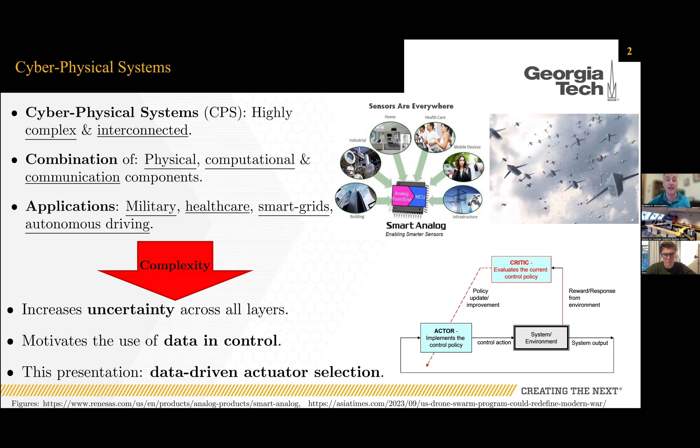This increases the complexity and the uncertainty across all layers, which again incorporates layers of physical, computational, and communication layers. Our work tries to bring ideas from data-driven control, and we want to see how we can intelligently place actuators and sensors in such a system with less information about the model, while letting it be adaptive to change, and also resilient to different adversarial components that can enter the system as it becomes more intelligent.

Before we see how we can actually select actuators and sensors, I'm sure all of you are familiar with what an actuator is. It's a device, which you can see on the right, that can implement a control input. In other words, it is every column in a matrix B. For example, if we take a linear system, x dot equals, say, Ax plus Bu, every column of the B matrix is actually an actuator, okay?

So why do we want to actually work on actuator selection in complex adaptive systems? Because we want to improve controllability, we want to be resilient to several faults and failures, and we want, of course, to improve energy efficiency. So this is a small motivation of why.

And of course, actuator and sensor selection are dual to each other. You can think that a sensor is a row of a C matrix, and then you want to improve observability, but while also being resilient to faults and failures and so on. So every time I talk about one, you will also see the dual.

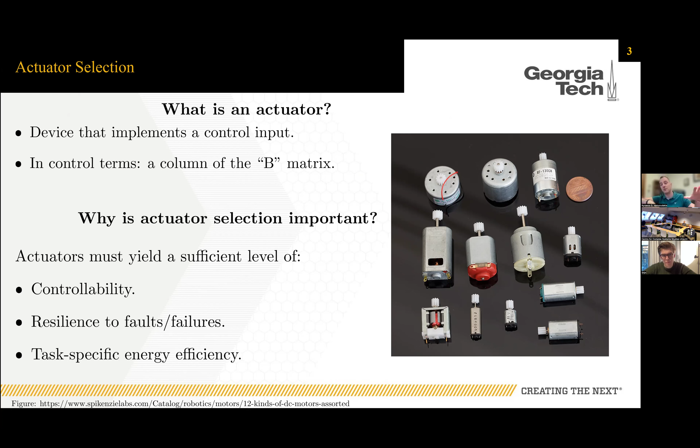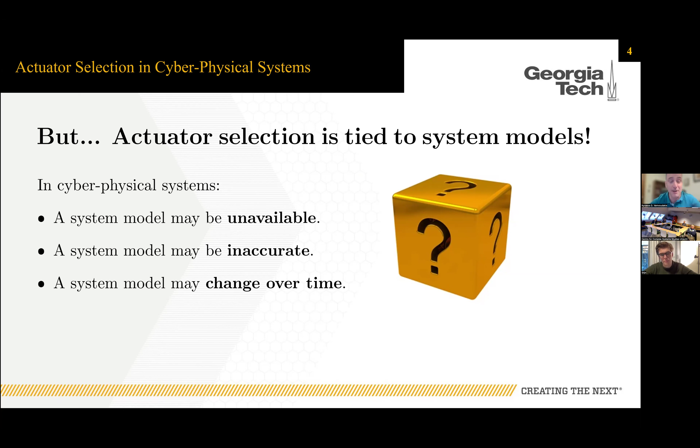Up to now, if we want to make complex adaptive systems, we want to make our algorithms depend less on models - in other words, completely data-driven and completely model-free. Up to now, every time you want to select your actuators to incorporate into your system, everything is tied to system models. But in a cyber-physical system perspective, if we want to make them more intelligent and adaptive, we don't know much about the system, or it might be inaccurate, or it might change over time.

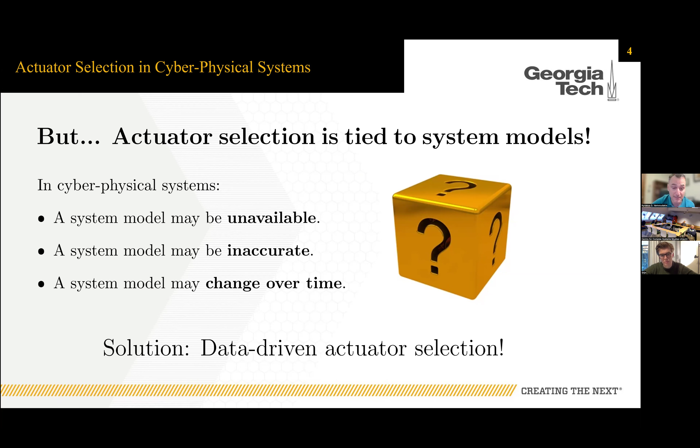So we want our algorithms to be less dependent on our systems, and what I mean by that is the physics of the system - the dynamics of the system. That's why we have been working on solutions that are data driven, and you will see how this can be achieved.

So let's actually start motivating the problem and see how we can take a model-based approach and make it model-free. As controls people, we work with dynamics. Let's say, for example, I have a linear system x dot equals Ax plus Bu, where x is the state, u is the control input, A is the drift dynamics matrix, and B is the input dynamics matrix. Everything I develop later will be model-free, but I want to motivate it based on the model first.

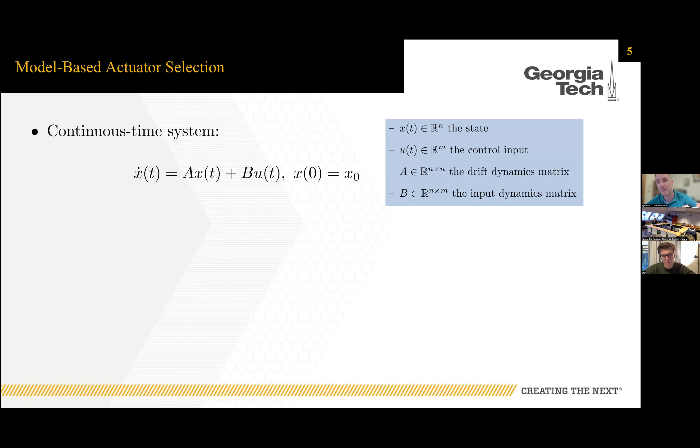And of course, we have worked also on nonlinear systems, but I want this presentation to be clean and show you how clean equations we can get.

As I said before, each column of this matrix B that's linear to U is an actuator. So every B matrix will have a B0 part and a B-script-B part. What this means is that we have already incorporated some actuators into the system, but we want to select some more to improve controllability, improve resilience to faults, and so on. So every time you see B0, that's the actuators already part of the system, and every time you see B-script-B, those are the actuators that need to be selected.

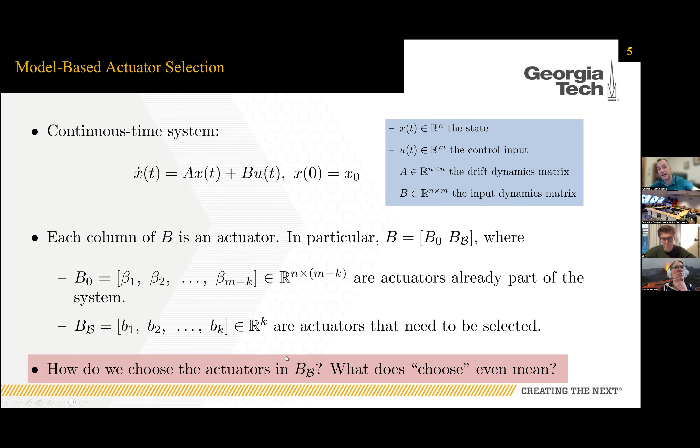So we have freedom in only picking this B-script-B. I want to choose the best ones, put them into the system, improve controllability, and so on, as you will see. But before that, what does it mean in practice?

I have a pool of available actuators, and usually in a complex adaptive system or cyber-physical system, you have redundancy in everything you do—redundancy in your sensors, redundancy in your actuators. So if something goes bad, you want to put something else in.

So what does choose mean in our framework? Every time I say choose, it means I have a pool of available actuators—let's say I have n of them—and I want to pick the best k of them to put into the system, in a way that improves controllability.

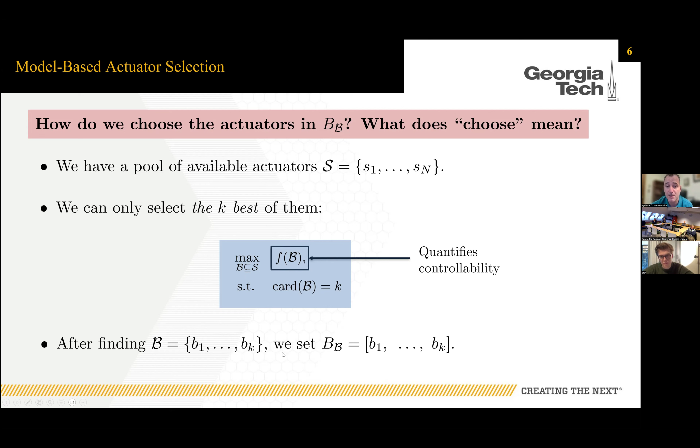Since I want to improve controllability, every time I say improve, it means I want to maximize or minimize—in our framework, we want to maximize controllability. So I have to find what I want to maximize, and this cardinality B equals K is because I want to pick the K best of them. After we find this K, as you'll see in a bit, we set them into the choosable B and incorporate them into the system.

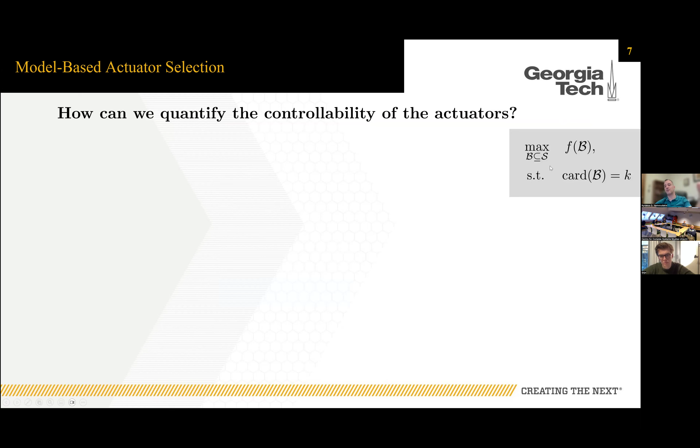I told you I will maximize controllability, but I didn't give you an equation for it yet. This f of script B will be quantifying the controllability.

Let's say we take a pure minimum energy control problem where I want to minimize U, picked in this way—this is a straightforward optimization problem, a minimum energy problem. The more controllable systems have smaller optimal values. This has a straightforward closed-form solution, given by this expression, which is the optimal value. Of course you see this Q that is inverted—every controllable system has this invertible. This is the controllability Gramian that we've all seen in several controls classes or papers.

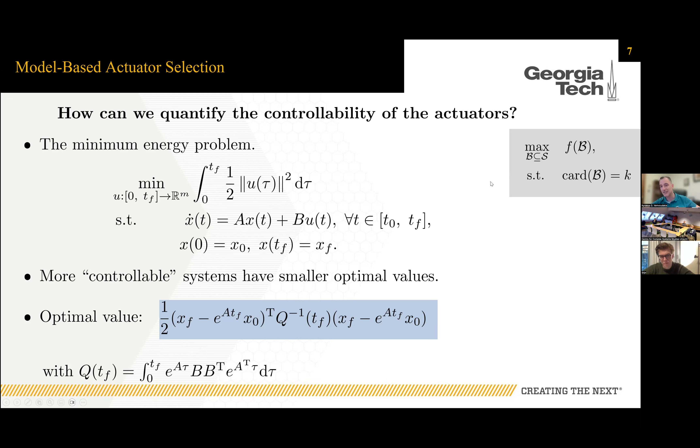So let's see how we can incorporate this controllability Gramian inside this optimization. Again, this controllability Gramian quantifies the efficiency of the B matrix. As you can expect, the larger Q is better, and the smaller Q is worse.

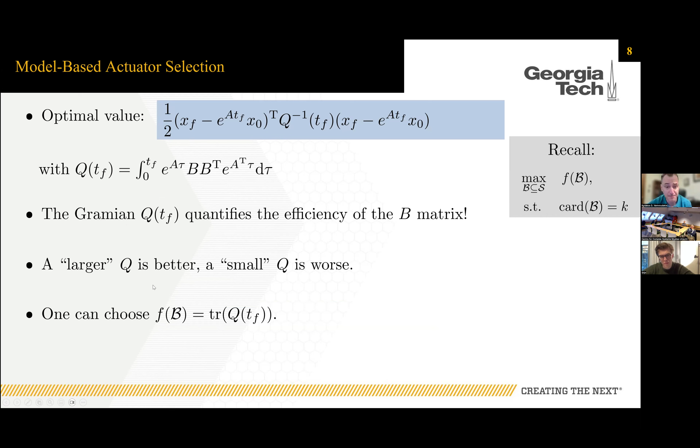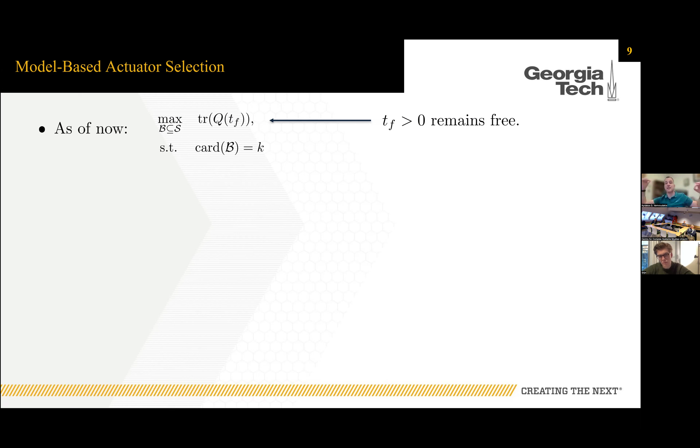So let's choose this f of B to be the trace of the controllability Gramian. As of now, we have found that I want to optimize the trace of the controllability Gramian, and still my final time remains free. Of course, I want to do this optimization with respect to having k actuators to choose.

So we still want to provide a framework that solves all these equations in real time, in a data-driven way, without requiring any information about A and B.

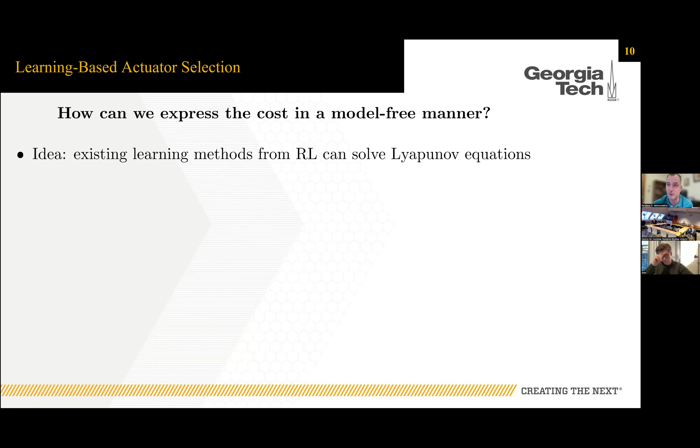Our work has done lots of stuff in reinforcement learning. Let's see how we can use learning methods from reinforcement learning to solve this Lyapunov equation that you saw before. The reinforcement learning methods we use in control focus on the dual Lyapunov equation. What I mean by dual is that the transposes appear in a different way. You will see why this can potentially be a problem.

We can have a theorem where we can solve this f of B in a closed form solution. But all these things are model free, and we still haven't found a solution up to now of how to do that. You will see how we can convert these Lyapunov equations, which are in a form not dealt with before in RL, to a form we can deal with and solve in a model-free framework. We had our controllability Gramian before, so now we've rewritten our optimization problem in this way.

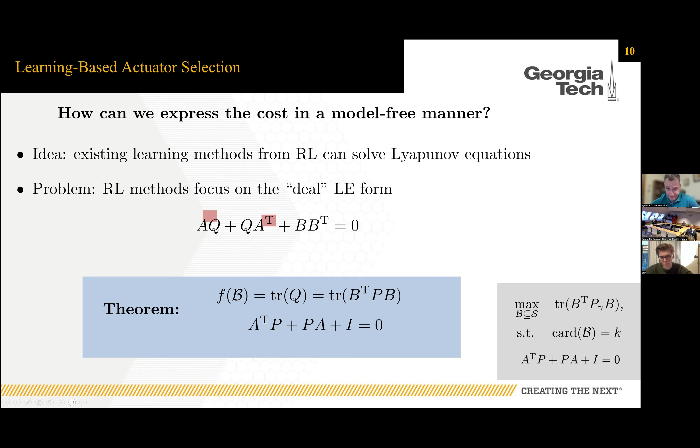Let's see how we can use reinforcement learning to express our cost with data, completely data-driven. The main idea is pretty simple because this A transpose P plus PA is almost the derivative of X, vaguely speaking. Let's see what we can do.

Every time we want to do reinforcement learning, we want to have everything that we don't know in a component that we will approximate. We call it a weight vector, or the vector of unknowns. Then we use everything else as a basis or activation functions to tune our weights. Since this A transpose P plus PA is almost the derivative of X, the matrix P will satisfy these equations.

Remember, I want to find this P if I knew the model. Since I don't know it, I just want to put it in a vectorized form. I vectorize my matrix P and put all the unknowns there. Then this is, you can think like an activation function, which is like different Kronecker products of the states and the control inputs that you put into the system.

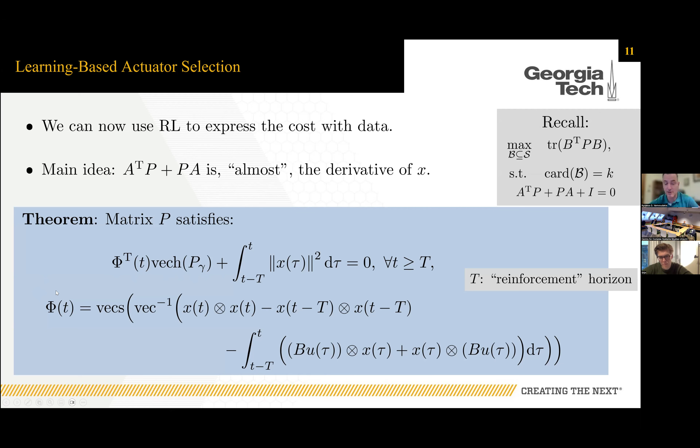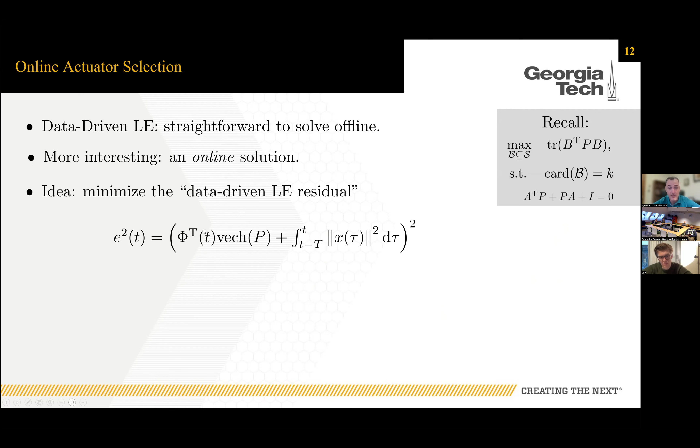So what people in reinforcement learning do is define a square error. If you didn't have this square here, what you'd have would be called a temporal difference error. So then I can do pure gradient descent on this and pick my vectorized P to take this error to 0. This is actually what I told you just now.

So now I can find the components of the unknown matrix P that you see over here. And I can solve it without having any information about the system, as you can see here.

Of course, everything we do is guaranteed with different theorems. We actually prove that I can identify my ideal P given some persistence of excitation conditions on phi. Persistence of excitation means I incorporate some noise into my control inputs to do the exploration we want in learning, which is actually equal to doing persistence of excitation in adaptive control.

Of course, we can also relax this persistence of excitation by using previous data. But for now, let's focus on that one. Here we will be able to solve the problem you see on the right-hand side, to find the P without information about the dynamics, and we do it online.

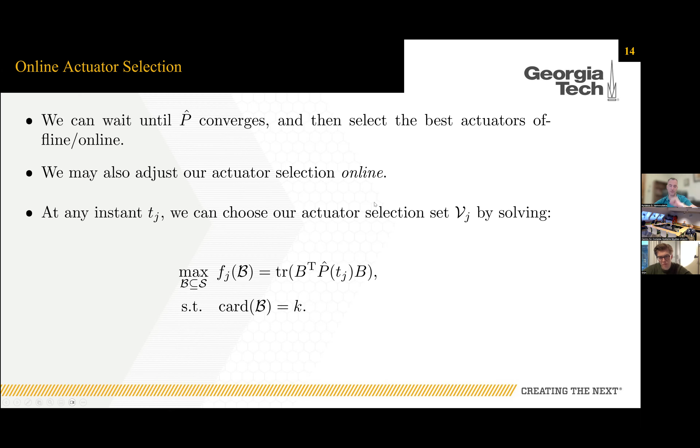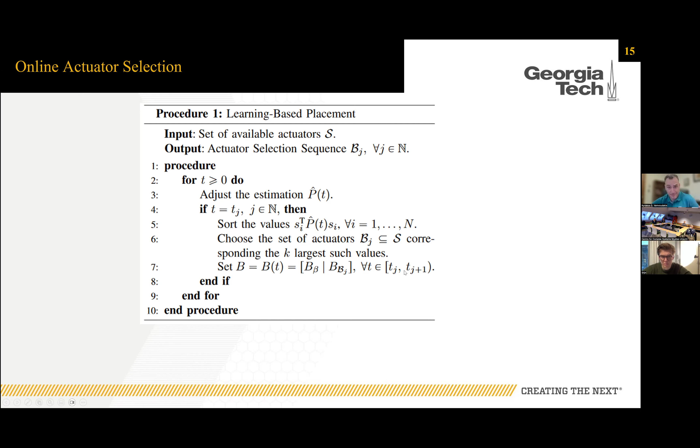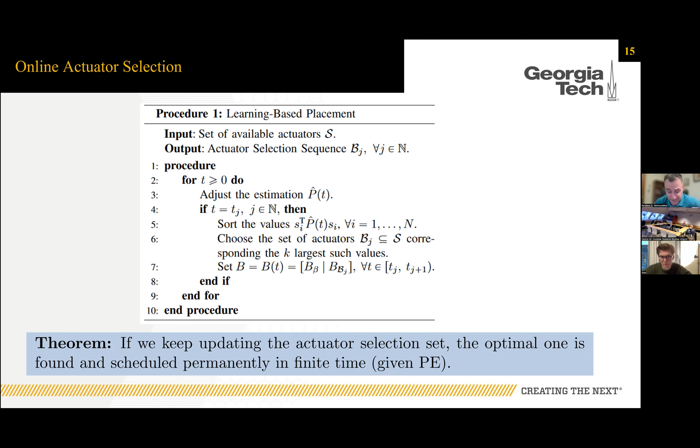Of course, as I said, everything we do comes with guarantees and theorems. So if we keep updating the actuator selection set, you will see every TJ I will eventually find the optimal one, and it will be scheduled permanently in finite time, given of course I have a guaranteed persistence of excitation condition.

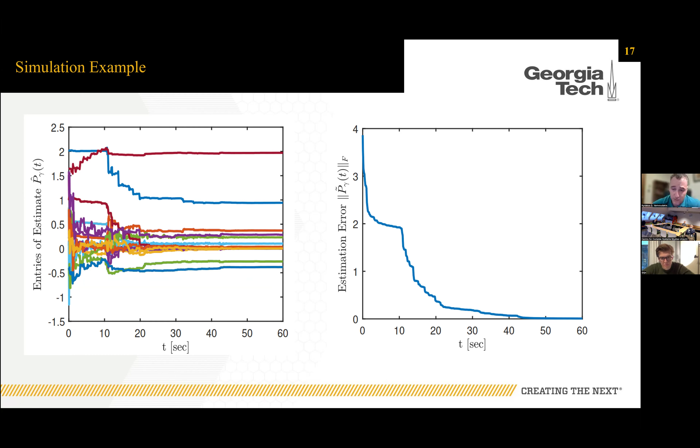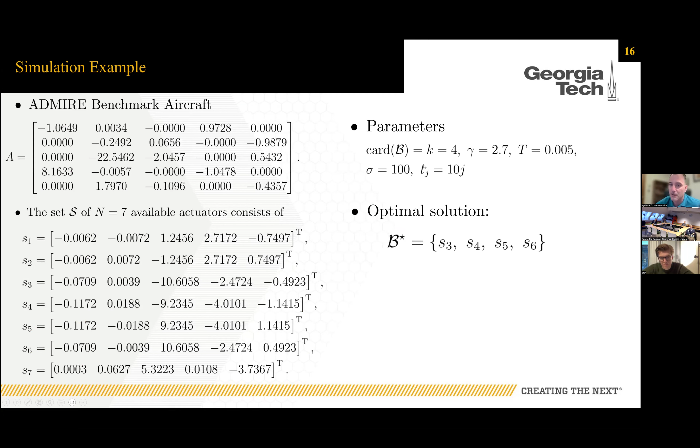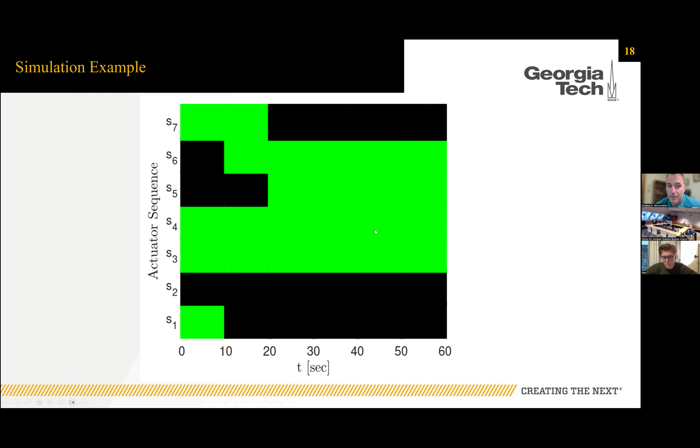Here you can see that black tells me which actuators have not been used, and green are the ones that have been used. You see that the optimal one is 3, 4, 5, and 6, which is the same as my offline solution, and all these things are learned in real time. Again, black tells me the actuator is not used, green means it is used. So again, 3, 4, 5, and 6, which is the same as the offline solution.

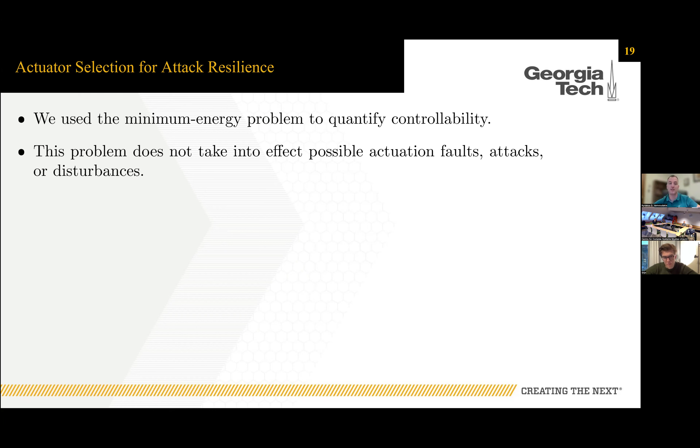Actually, this is pretty straightforward. We can reformulate this as a game. We can have a zero-sum game or minimax solution where I find the minimum over U and the maximum over A. A can potentially be a worst case attack, worst case disturbance, or anything unmodeled to my system. So now instead of quantifying the controllability as before, I can quantify this using the game equations.

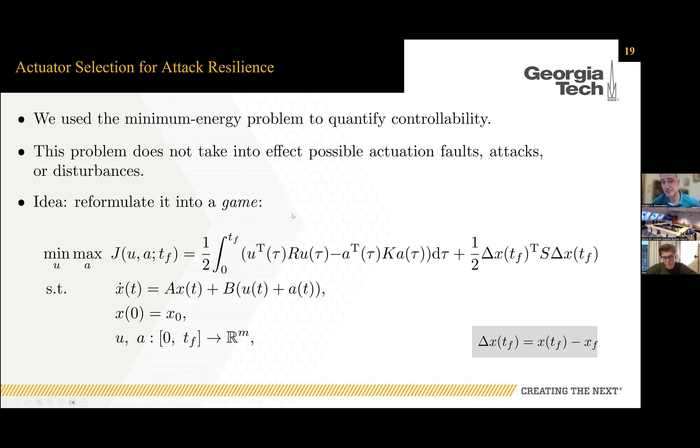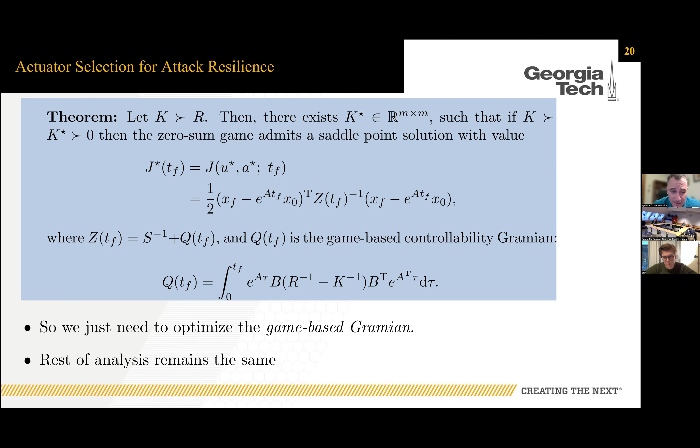So again, everything that we did before will be slightly changed. Instead of having the pure controllability, I have this game-based controllability Gramian. And instead of learning the solution to the controllability, I learn the solution to this game-based Gramian. All the analysis after that remains the same.

So now, what we have done up to this presentation, we have developed the first model-free actuator selection algorithm. By design, all these actuator selection algorithms are very computationally expensive even to solve offline. We selected our actuators to quantify both controllability and attack resilience, and of course, every model-free approach we do, we want to show equivalence to the model-based approach.

We don't want any relaxation—this isn't a relaxed version. This model-free version converges to the model-based approaches, and we have published several papers on that.

Let's see how we can even improve on that in other scenarios. What you saw up to now was that controllability was measured on average, but not really across closed loop trajectories. So let's see what we can do now.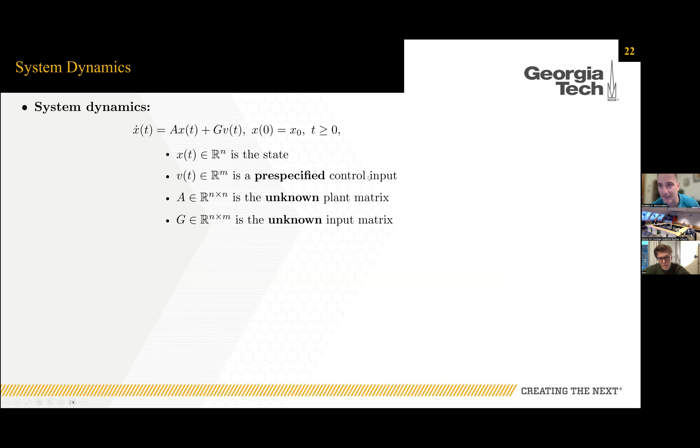Let's change the framework a little bit. Let's say I have again my linear dynamics: X is the state, V is any pre-specified control input, and A and G are unknown plant and input matrices. Of course, every time I want to map from actuators to controls, I can write this V as BU, where B is columns comprised of the actuators, and U can be actuator commands.

You'll remember I told you about actuator redundancy. A system is actuator redundant if I can pick a K larger than M, which is the rank of matrix B.

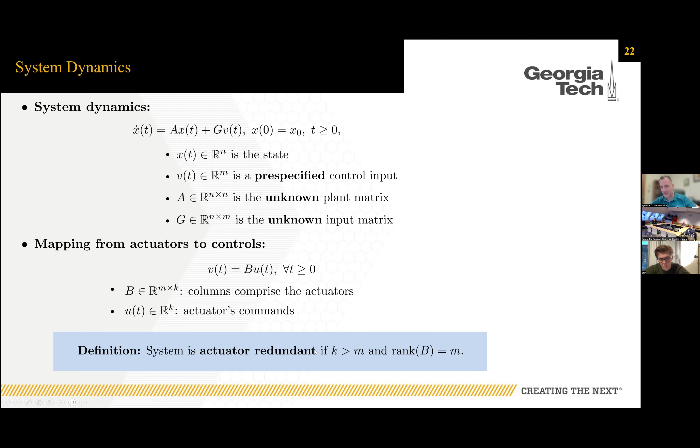Since we don't want to do this only on average, we want to do it across closed loop trajectories. So our problem now becomes an optimal control allocation, not an actuator placement anymore, but optimal control allocation. This is another important problem in control. Let's see what this problem actually is.

With actuator redundancy, I can always write any control input V with the proper choice of U, since V is BU. So what I want to do in the allocation problem is choose my U with minimum energy—this is pretty straightforward. This W is just how much I weight each actuator. Again, this has a closed-form solution, pretty straightforward: the optimal solution is this one, and the optimal cost is this one. Nothing interesting up to now.

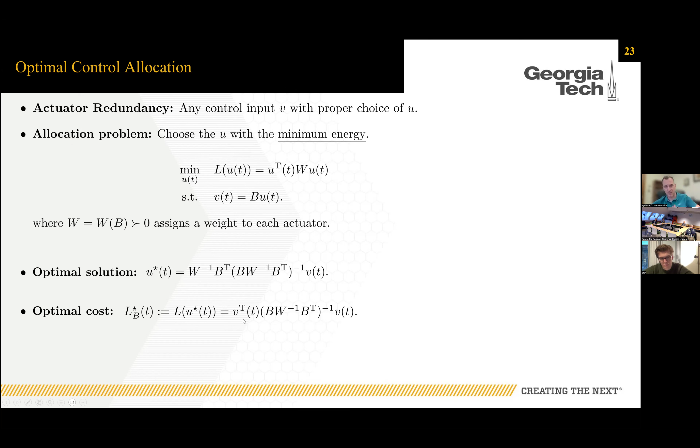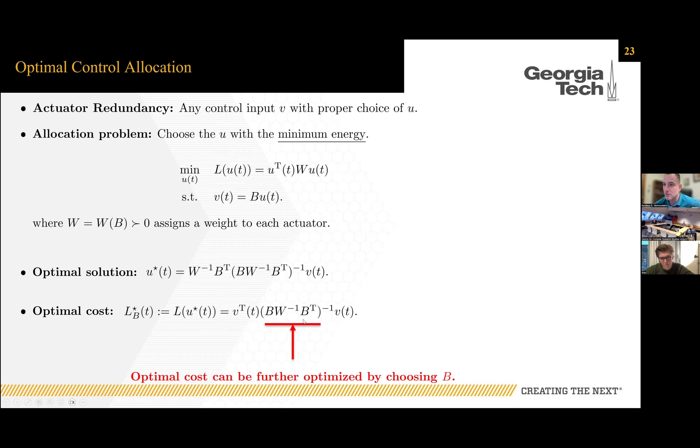But I want you to pay attention to this part: BW inverse B transpose. I can improve my cost by changing my B's and my W's. Let's see what I can do with that.

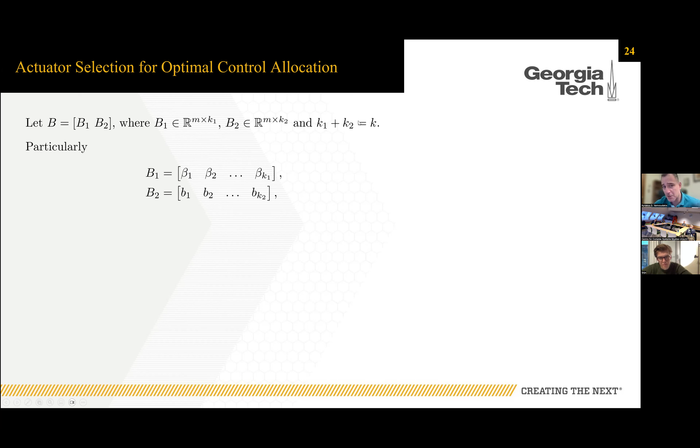Let's try to see how we can incorporate whatever I did before for actuator selection, but now for optimal control allocation, in the same framework. Let's say I have a B, which is B1 and B2, and if I add how many I have in B1 and B2, I will get K. Same as before, I have a fixed part and a choosable part.

So same as before: I want to pick the choosable part so that the minimum energy, LB star T, that you saw before, is minimized. And I want to do that by changing also something I've done before.

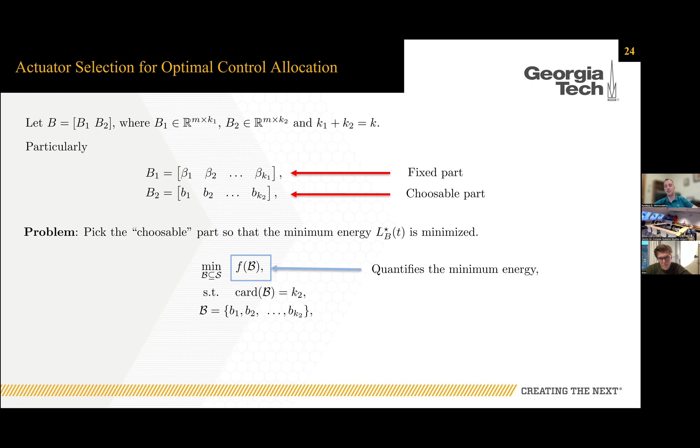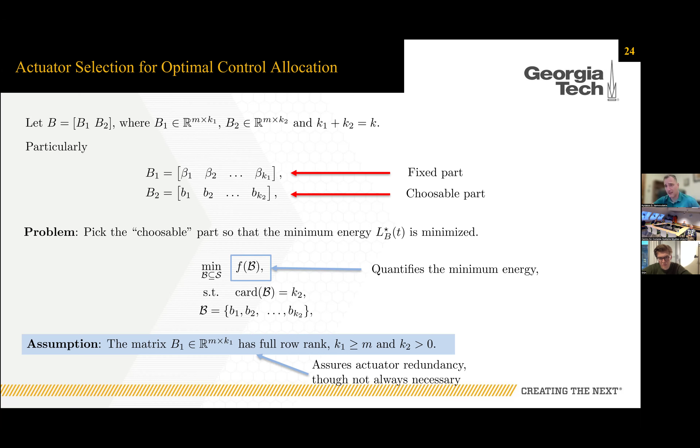This f of b is not the same as before—it will be changed a bit. This f of b will quantify the minimum energy; before I was quantifying controllability. The matrix B1, the fixed part, has full row rank—this is to assure actuator redundancy. This is not always necessary, but to make the results cleaner here, I have to stick with it.

Let's start seeing in very simple steps how we can do this. Case one: agnostic actuator selection. Remember that the minimum energy I found, the cost, is given in this framework. Of course, if I don't know V, I cannot directly optimize that over all the B's.

So I can do that on average instead. My f of B, which I want to optimize, will be the trace of BW inverse B transpose. This is what I want to eventually optimize, because this minimum energy can still be optimized by choosing optimally this guy in the middle. Let's see now how we can do that. So this one is more agnostic—let's say, if I knew V, what it would be.

Suppose now that my V has an initial condition distribution known as Kx, okay? Of course, my A plus GK is Hurwitz, okay? So I can optimize this minimum energy directly over an infinite horizon, and I can choose my F that I want to optimize from before to be this one, okay?

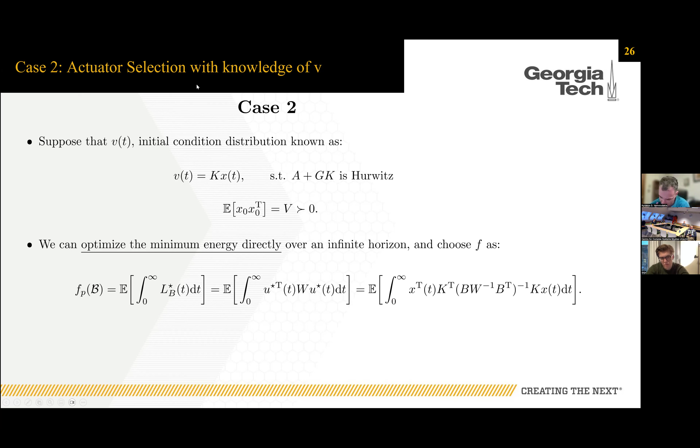Again, remember, this is what if I knew the V. The before was if it was V agnostic, okay? So this is how we can optimize my FB and solve it.

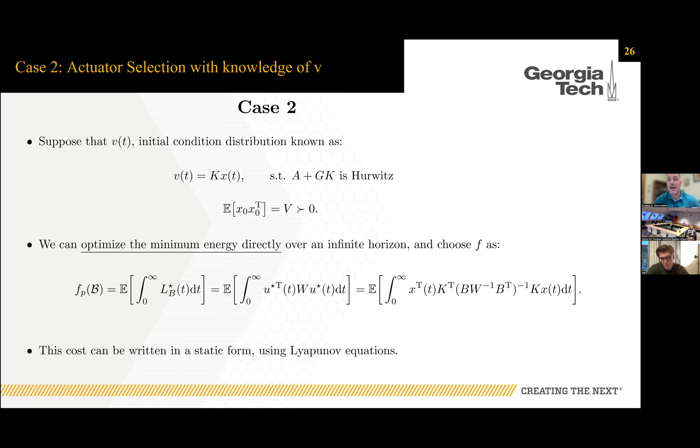Okay, so again, since I want to eventually do learning in these model-based equations because I want to make the model free, I know how to solve equations that come in a form of Lyapunov equations. So let's see actually what we can do.

So I'm trying to solve this problem here with some Lyapunov equations. It was straightforward to derive that this problem can be solved by these two coupled Lyapunov equations. So then instead of solving QR, I can definitely solve also a trace of PV.

Okay, of course, if I do the PV though, it is actually inefficient because this solves Lyapunov equations for all points in 2 to the power set of S. But using the trace of QR requires solving only one Lyapunov equation for Q. Okay, so let's see how we can do that.

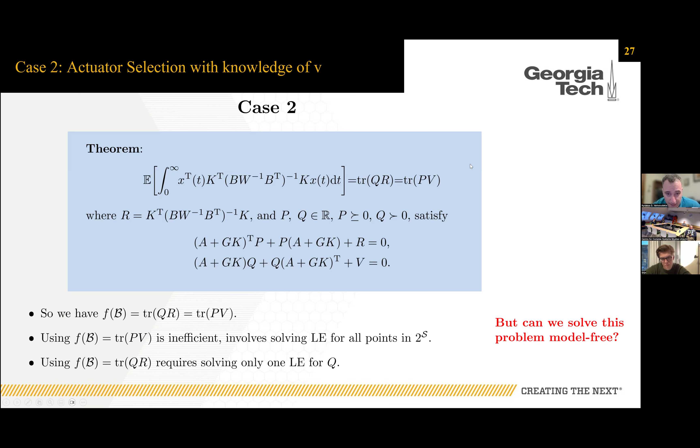And of course, I want to do that in a model free way. I don't want to have any offline solutions and solve all these equations by having information about the system.

Okay, so again, recall now that I have picked my cost function to be this trace QR subject to these Lyapunov equations. Okay, so as you see, the only part that has information about my dynamics is the second part. Remember that my system was x dot equals ax plus gv. So the only part that has information about the system dynamics is the second part.

Okay, so but still also the cost depends on Q, which also depends on A and G through the Lyapunov equation. So let's see what we can do.

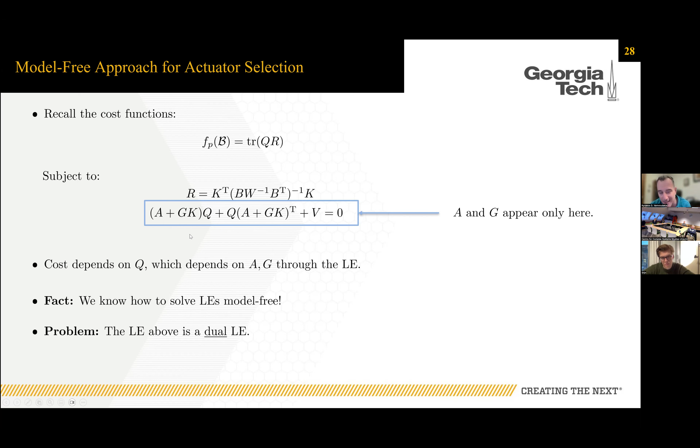Okay, we go back to our model-free formulations. But again, see that this Lyapunov equation has the transposes on the wrong part. It's not really a Lyapunov equation, but it's a dual Lyapunov equation.

So how we can solve this problem is I have to turn it into a nominal Lyapunov equation, and after that, use the techniques I know in reinforcement learning to solve this problem.

Okay, so actually, we can turn this dual Lyapunov equation by multiplying left and right by Q inverse, and of course, Q is non-singular by our theorem that we had before.

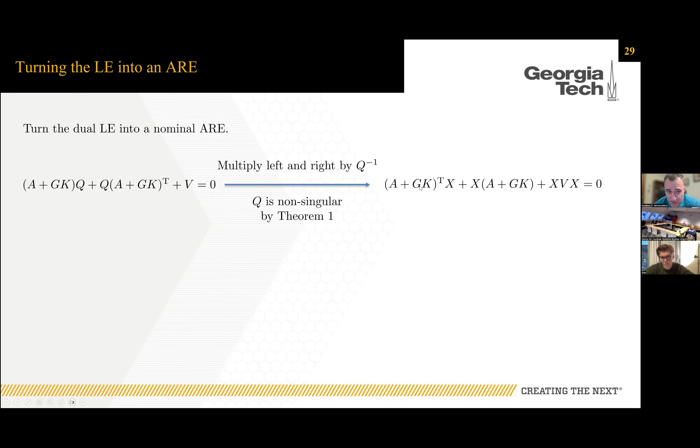So again, I can change my Lyapunov equation by multiplying left and right with Q inverse to make it look like that. Now you see that the transposes appear in the correct places. So we can use any techniques that we can solve these equations in a model-free framework.

Okay, and what we can do is we want to first find a gain that stabilizes the plant, A plus GK, and then I can perform any algorithm in a model-free framework such as ADP or off-policy learning and so on and so forth.

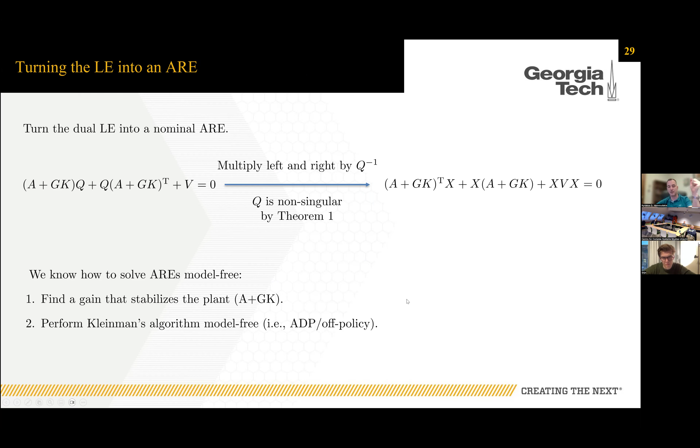Again, every time we have a Lyapunov equation, which is actually the dual Lyapunov equation, I can always put the known and the unknowns into different vectors, and then eventually I can solve it with off-policy learning.

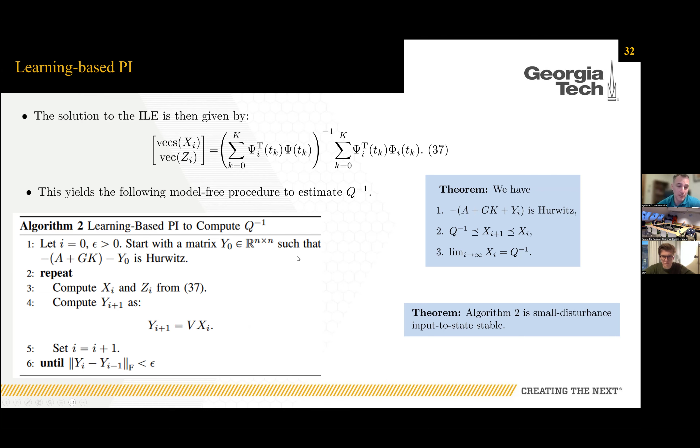So again, we prove also that not only the model-based framework is converging, but also the model-free framework will converge with different theorems. And then, of course, we prove that this algorithm that you see on the left is small disturbance input to state stable system. Let's see how this can work.

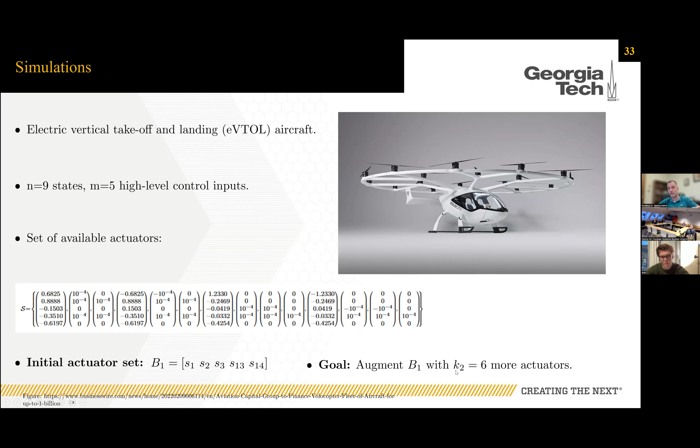Let's say I have this eVTOL, which has 9 states and 5 high-level control inputs. The available set of actuators can be picked from this pool over here. My initial actuator set is incorporating 1, 2, 3, 13, and 14. And I want to augment my initial actuator set with 6 more actuators. So let's see, remember my cost function was Q and R, right?

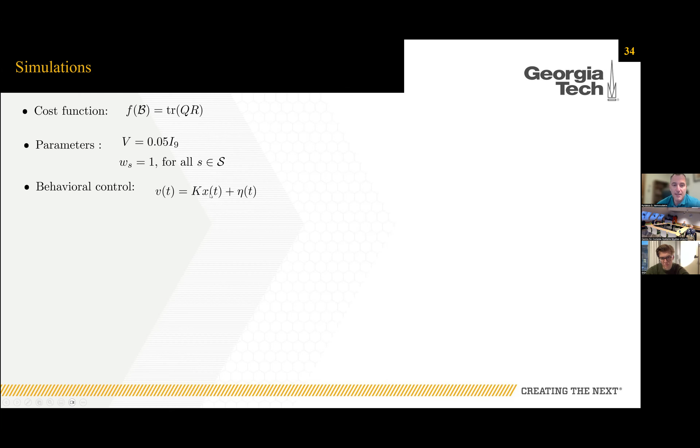My parameters and my behavioral control can be Kx plus eta. Again, remember that I want to guarantee persistence of excitation, and I can do that by incorporating some exploration noise. So what you see on the left is the norm of the states, and you can see that it goes to 0, it's very small.

Also the norm of V, which is my control. And then here you see that eventually my off-policy learning was eventually converged to 0. So this is the error between Xi, which is the converged, and Q inverse, the optimal one. So you see that converges to 0, and so eventually I converge to the right solution.

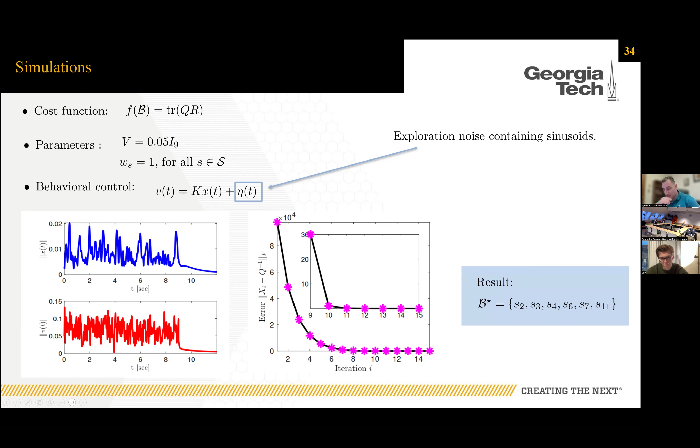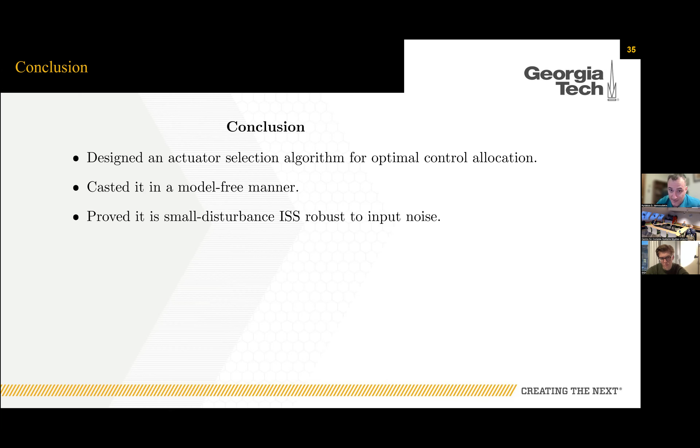So if I do that, then you will see that the optimal solution will be 2, 3, 4, 6, 7, and 11, which actually agrees with our model-based techniques. So what we have done up to now is we designed and found solutions to some computationally expensive, even offline frameworks, and we do them online in a model-free way, and we prove that it is small disturbance input state stable, and we're robust to input noise. And then we have published several papers on that.

Okay, we have questions? Thank you very much. No, we have more. We have more. Oh, you have more? We have a little more. I heard some noise, I was like, do we have any questions up now? We have a little more.

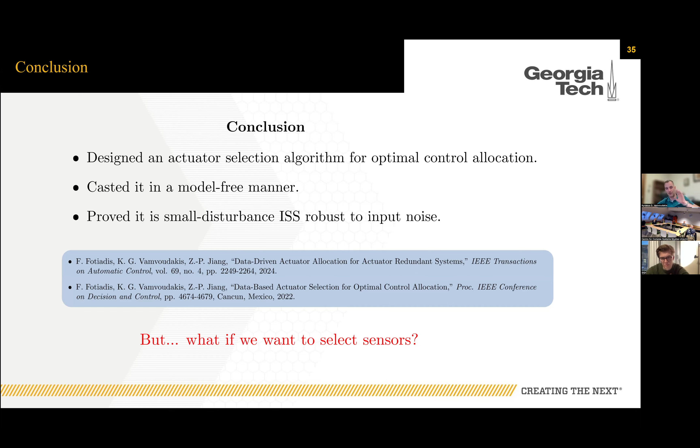And so I told you that the actuators and the sensors, they are dual. So let's see actually how we can do sensors now, pretty brief. And again, we can deal also with discrete time systems. So let's say that I have this system here, xk plus 1 equals axk plus buk, and y is cxk. And again, now a, b, and c are unknown.

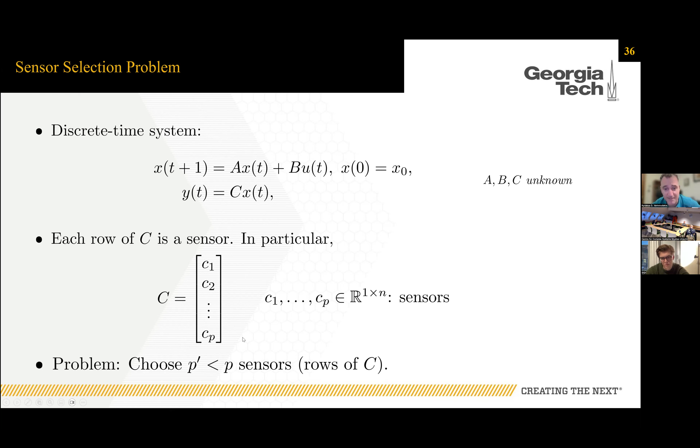Remember before I had columns for actuators, now I have each row of C is a sensor. And I want to choose some of the sensors in this C matrix. So of course I can choose a P prime, which is less than P, where P is the number of rows of C. So again, remember that choosing sensors is actually choosing rows of C. So in a similar framework with before.

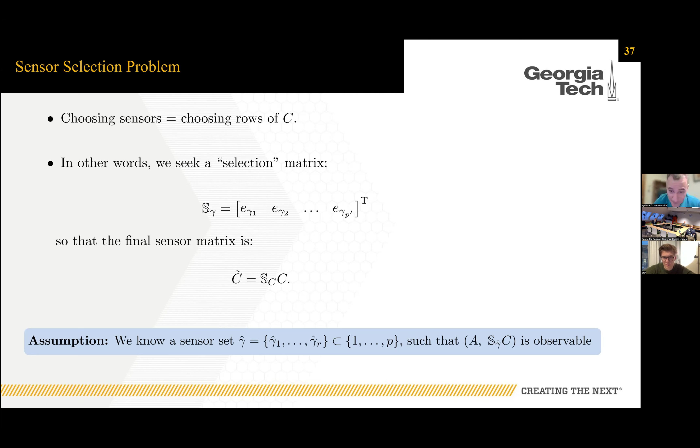So we want to make sure that I can find a way to pick these rows of C. So this is a selection matrix, you can think this has 0s and 1s. And the final sensor matrix will be C tilde, which is this selection matrix multiplied with C. Again, vaguely speaking, we can find this E gamma 1 to E gamma P prime. So again, for us, we need to know an a priori set of sensors that will make our A S gamma C observable.

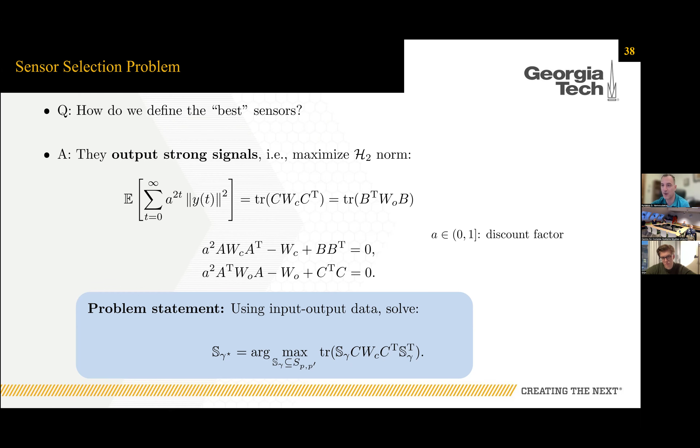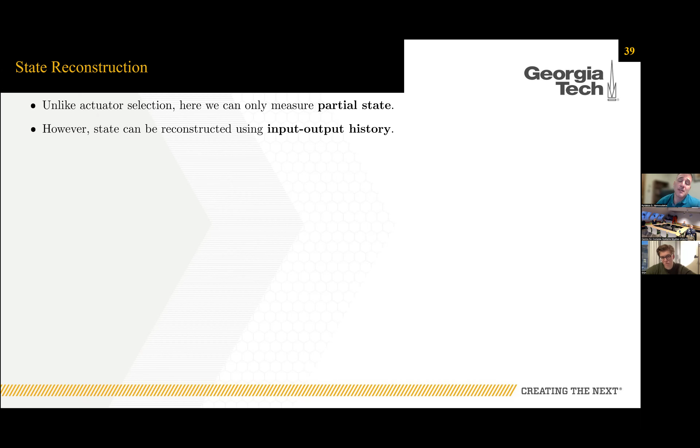In real time, without any information about A, B, and C. So here, because I do sensor selection, I don't have full state feedback as before for actuator selection, but only partial information about the state, because I only have the output. But every time, if I'm observable, I can always reconstruct my state using input-output history.

And I can always write my state as a matrix multiplied with previous inputs and previous outputs, and reconstruct my state based on that. My M matrix has to do with controllability, observability, and a Toeplitz matrix.

So let's see how I can actually make that work without information about A, B, and C. I will denote the cost function as J infinity. This is the cost function for picking the S gammas, and these are just definitions of different data matrices. I have my phi's, which you will see what they are.

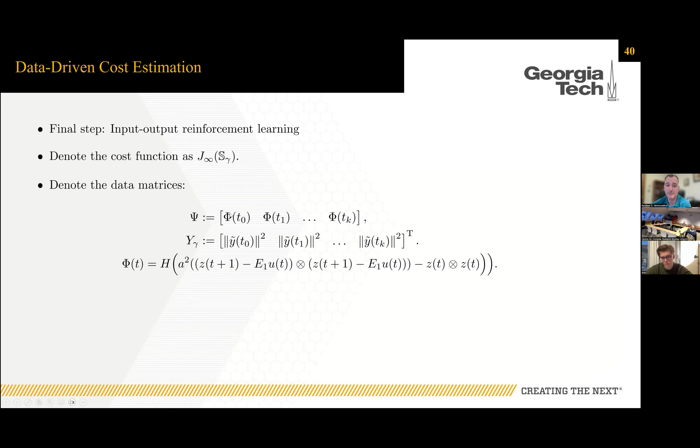I have my y's, and something that will serve as an activation function. These are the outputs of the sensors to be evaluated. And here, I check the rank of this Psi matrix to see when I can find the optimal solution for the selection matrices.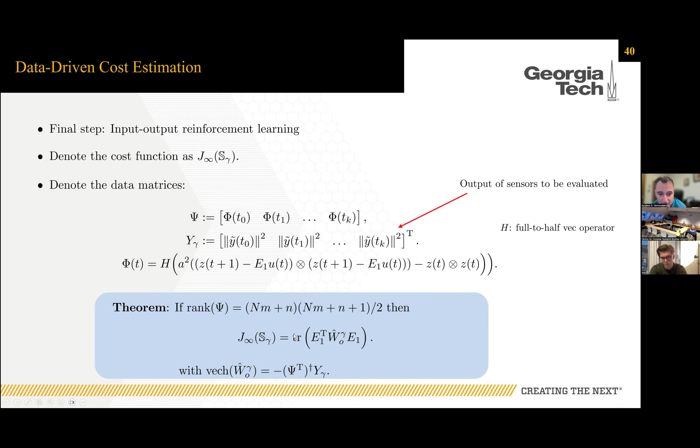So now I can design a greedy algorithm to find the best sensors in polynomial time using all the input-output data. I gather input, evaluate the cost of the selection matrices, sort them in decreasing order, and then update my C.

So let's see actually what we can do. And of course, we have proofs that all these things converge to the best set of sensors. So now, what I want to show is that these two things are dual, not only on the continuous time system you saw before, but also on the discrete time system. That's why I said the same process can be used also to select actuators.

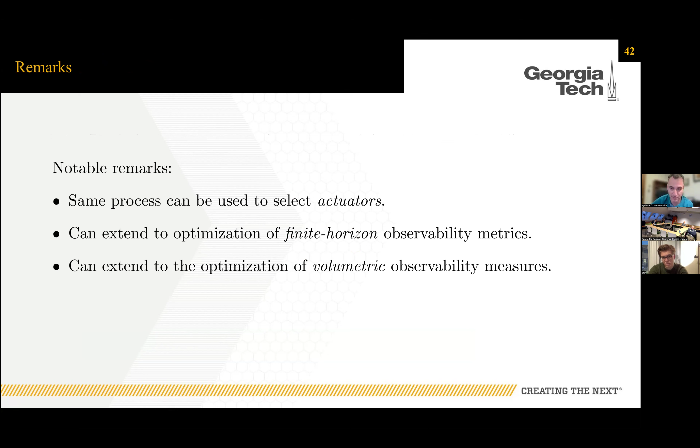So we can extend our optimization to finite-horizon observability metrics, or we can extend to optimization of volumetric observability measures. Let's see some examples.

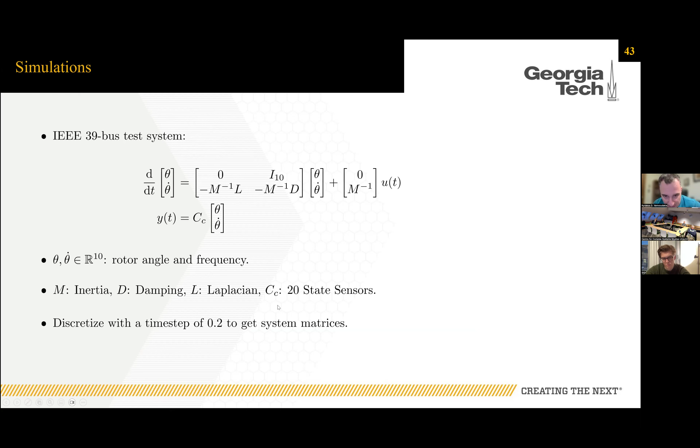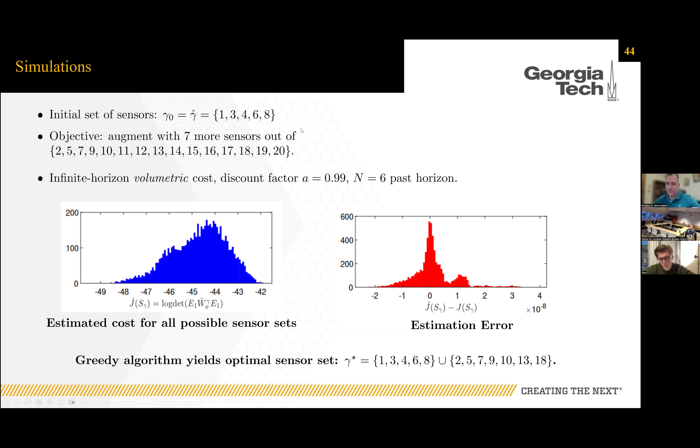And the greedy algorithm found the optimal sensor set and told me that, given 1, 3, 4, 6, and 8, you need to augment this with 2, 5, 7, 9, 10, 13, and 18 out of this set. And again, we prove that this is actually the optimal set.

So what we have done in this last part is not utilized reinforcement learning for control, but we showed how we can use reinforcement learning to select sensors and actuators. We used approaches applicable to continuous and discrete time systems with state and output feedback, and showed several simulations in large-scale systems. With that, I would like to thank you all for being here, and I will be happy to answer any questions. Thank you.